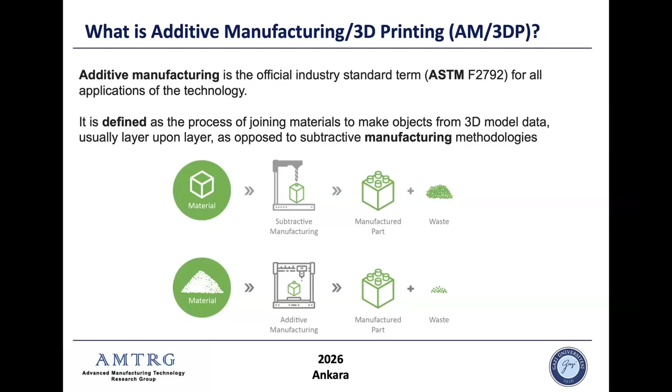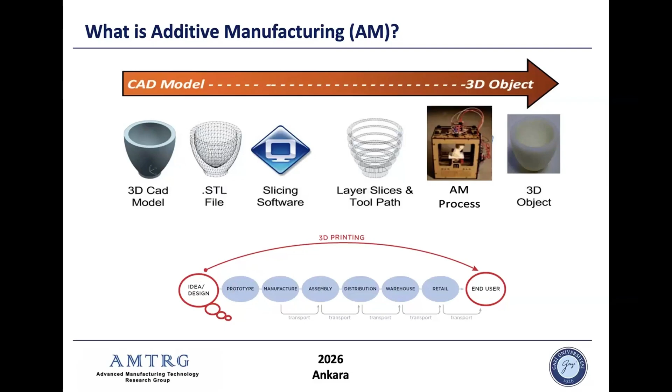And in additive manufacturing, of course, we manufacture parts from CAD data. I mean, we actually omit lots of steps in manufacturing, like tooling, assembling, etc. We send the digital data to the additive manufacturing machines, then we build the part as it is.

This is very good. Right now, additive manufacturing has, as a standard, 7 main technologies. I'm not going to explain all of them. Maybe in the near future there will be more, but right now we have 7 main technologies in additive manufacturing. And these use raw materials: polymers, metals, composites, ceramics, etc.

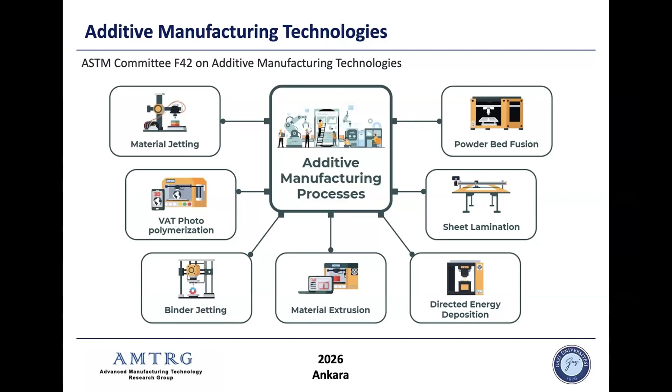If you focus on metal additive manufacturing, we actually use 2 states of materials. One is melted materials. We use 2 types of heat source. One of them is arc, the other one is a beam. That beam could be laser or electron beam. If it is arc, of course, we may use the welding arc or plasma arc.

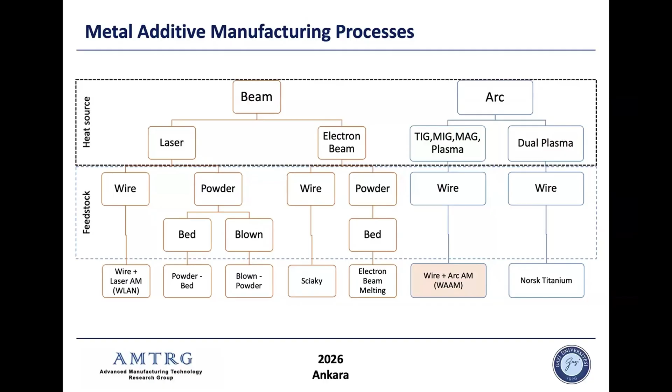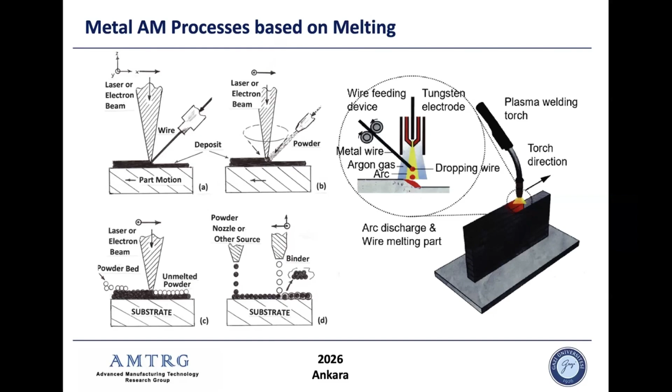So basically, we melt the material and we build the part layer by layer. Afterwards, the material solidifies, we produce the layer, and then we build the part as it is. So this is one way of building the part in metal additive manufacturing. It could be on the powder bed, or powder fed, or wire feeding, etc. This is how we manipulate the material. But at the end of the day, we use the metal in the form of powder or wire at the moment.

There are also other metal additive manufacturing methods. This is solid state additive manufacturing. We use friction stir welding: we do it not by melting the material but by stirring the material, building the part layer by layer. The other one, which I like very much also, is ultrasonic additive manufacturing. We ultrasonically weld each sheet of material and we produce the part as it is. This is also a growing solid state additive manufacturing method.

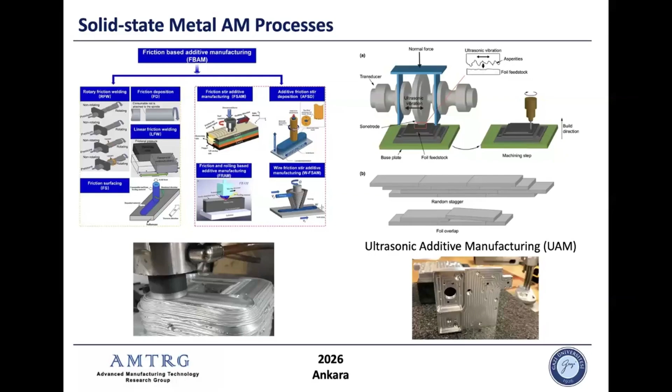Well, in my presentation, I try to get all of you to take a broader view of how additive manufacturing is growing. As I said, in additive manufacturing there are lots of technologies, but if you look at the additive manufacturing maturity index table, or that kind of graphic representation, we see which methods are widely used in industry right now or growing at the prototype stage.

At the moment, laser-based powder bed systems have the highest industrialization index as well as technology maturity index. Electron beam powder bed systems are similar, but a bit less than laser powder bed systems. That's why, right now, powder bed systems are selling a lot.

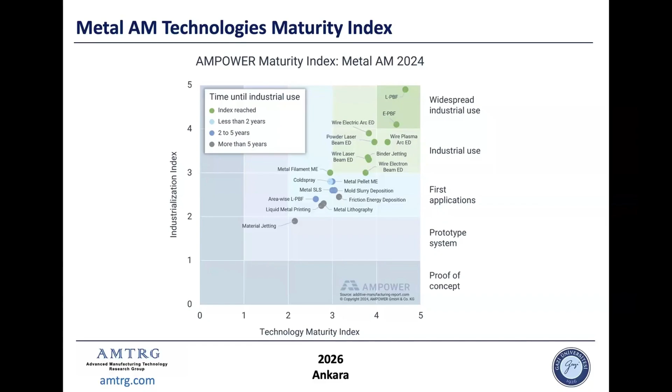But of course, we cannot say that the metal additive manufacturing processes have the same advantages. When we compare them together, in terms of complexity, yes, the powder bed additive manufacturing systems have more flexibility to give out truss structures, porosities, and very complicated shapes. But in terms of cost savings, they don't have that kind of advantage.

For example, WAAM, which is wire arc additive manufacturing, has better advantages in part size, platform flexibility, post-processing requirement, etc. So we may not say that one method is always the best. It depends on what kind of part you are going to build. So you have to select the proper additive manufacturing method, and you have to be conscious about it.

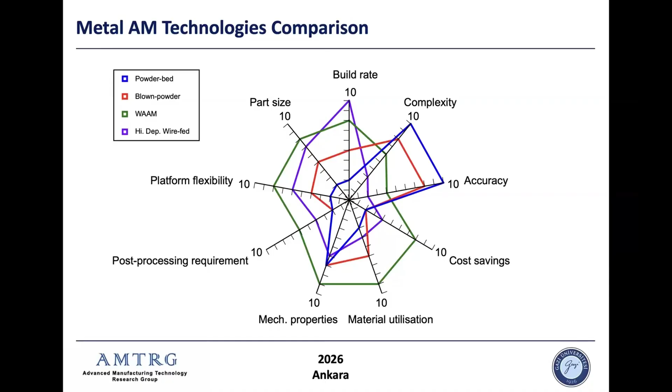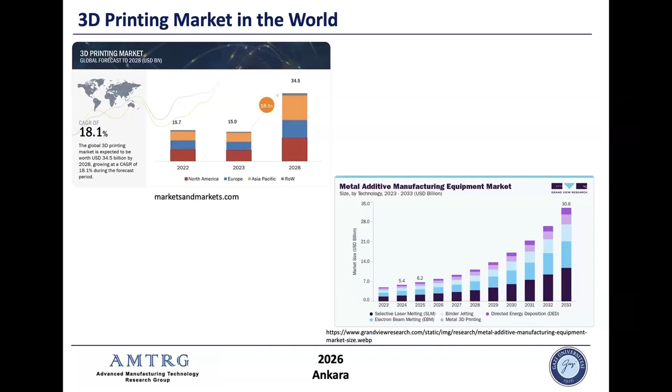When we take a look at the market, we see that over the last 10 or 15 years the market is always growing. In the pandemic years it went a bit down, but if we take a look at 2028, it's growing a lot. And the metal additive manufacturing market is also growing a lot. If you look at the metal additive manufacturing processes like powder bed, directed energy deposition, binder jet, you can see the amount. Yes, the powder bed systems have a big market size.

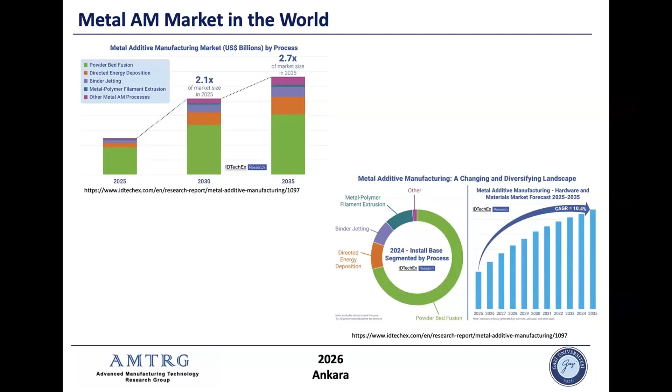And when you compare the powder bed side, because of the maturity index, it is now easy to use and the software is now fully developed. So you can use these systems on the commercial side. That's why it's sold a lot. Especially the directed energy deposition systems are also being sold a lot because they give high flexibility to build large scale parts as well.

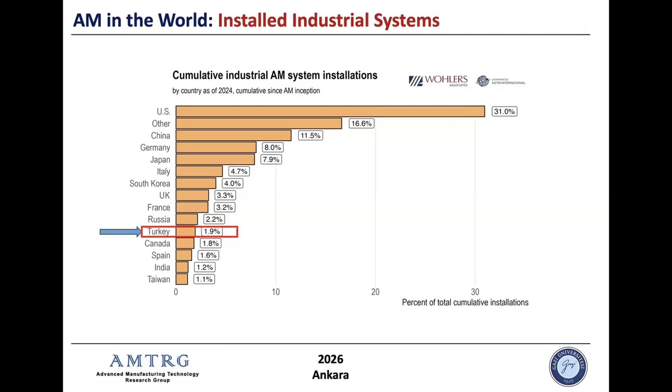The UK uses additive manufacturing for education purposes, a lot of PhD and MSc research, admitting lots of students. So that's why they invest a lot. Turkey is not in a bad situation, it's a good situation in terms of installation. But when you take a look at research, it's not similar.

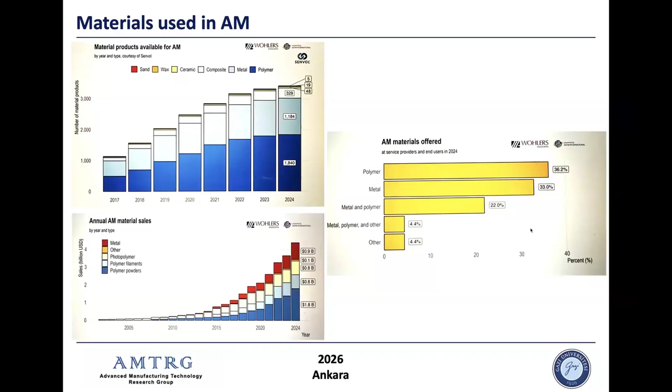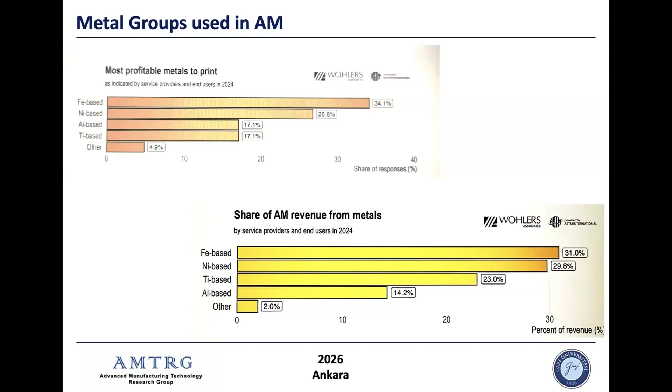Among the metal alloys used in additive manufacturing, iron base has the largest percentage; nickel base, aluminum base, titanium base come next. That's why at the moment the industry is more focused on iron-based metals like stainless steels or other types of alloys. Titanium alloys and nickel-based alloys are mostly used by aerospace industries, but on the commercial side, cobalt chromes and nickel-based alloys are very much used in dentistry.

And this is the pricing of AM metal powders. As you can see, rhenium is the most expensive one. Titanium is also expensive, both the wire and the powder. High entropy alloys are also expensive, and cobalt chromes and aluminiums are less expensive when we compare to the other metals.

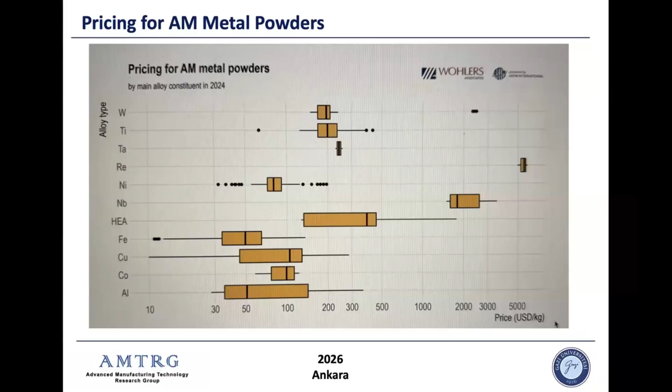On the research side, Turkey is 10th in installations, but I'm so sorry about that, we don't have a position in the first 20 countries. The US has the most influential effect on research. Then China, England, Germany, Australia, Italy, Singapore. I know that there are lots of big centers, research facilities, and universities with good establishments in research and additive manufacturing.

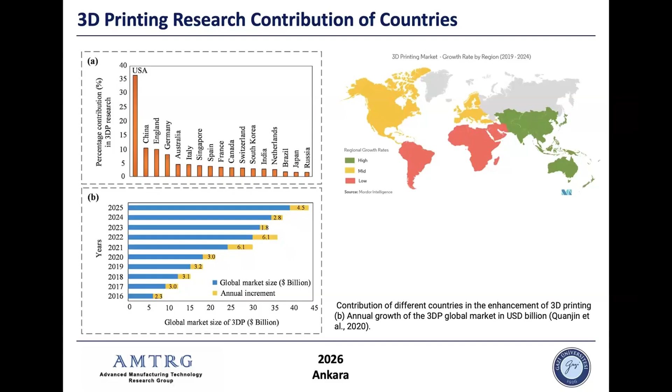And when we take a look at the research topics, as you can see, design for additive manufacturing comes at the largest scale, because at the moment the industry and people like to know how they can use AM in industry. That's why they try to find out which designs would benefit and be possible to build by additive manufacturing. Of course, microstructural and mechanical behavior analysis is next.

But when we look at the key keywords like digital twins, artificial intelligence, sustainability, and data management, yes, they are on the list. But especially modeling and simulation are the most researched in academic projects. And these are the shares of AM publications, and the GDP on research output as well. Again, US, China, Germany, UK, India, Italy, as you can see, these are the countries sharing these AM publications.

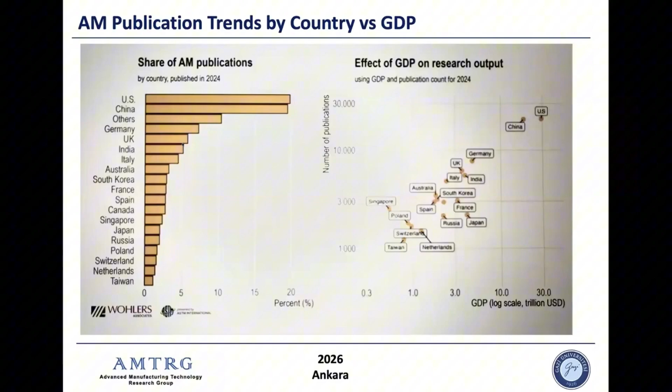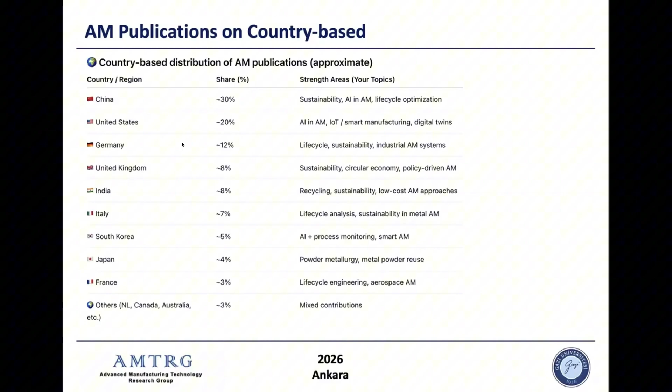And when we look at the country base, for example, China's share is 30%, and their strength areas are sustainability and AI in AM. United States, especially AI, smart manufacturing, digital twins. Germany, life cycle, sustainability, industrial systems. UK, sustainability. India, mainly recycling and sustainability. Italy, life cycle assessments, etc. So these are the main strength areas of the countries.

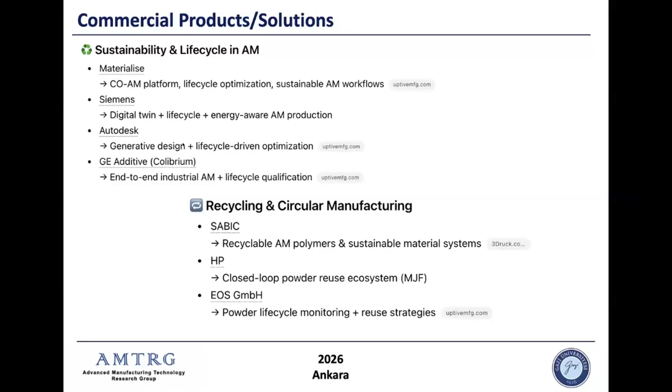And if we take a look at the company side, the commercial companies have some products in sustainability and life cycle, for example Materialise, Siemens, Autodesk, and GE Additive have some solutions and commercial products. On recycling, SABIC, HP, and EOS have some products as well. And Renishaw also has some commercial products. In artificial intelligence, Velo3D, Markforged, 3D Systems, and some other companies have products on these keywords.

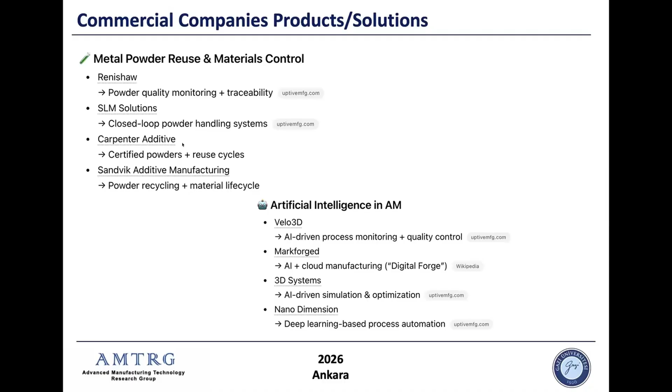And when we take a look at the continent side, like EU, APAC, and USA, the USA's core strength is especially AI, digital twin, and IoT. The EU, sustainability, life cycle, and circular AM, because, like your project, the EU pushed companies with regulations on sustainability and green technology, and also manufacturing. And the Asia Pacific countries focus on scale, materials, and powder reuse as well.

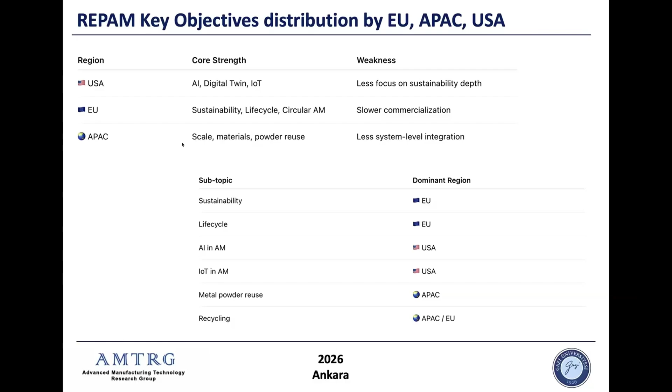Yes, in the last few years, work like Professor Sachin's on high entropy alloys is growing a lot because there are very good potentials there. And copper alloys and magnesium alloys are also in the circle. So therefore, much research is focusing on these materials as well.

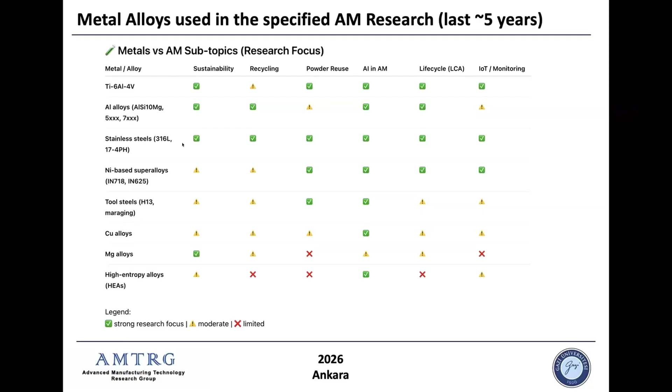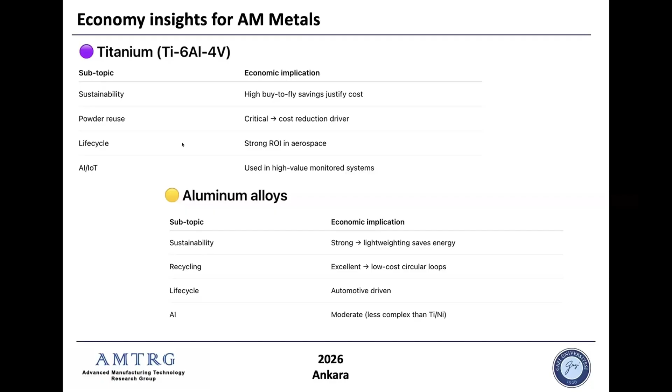These are some of the summaries of how these materials are economically, and why they are being researched in academic projects, like titanium and aluminum alloys in terms of sustainability. For example, from a sustainability perspective, titanium is a very popular alloy in aerospace. Because the buy-to-fly ratio is very critical in aerospace, we have to use titanium alloy as efficiently as possible. These other materials are summarized from the economic perspective and recycling sustainability as well.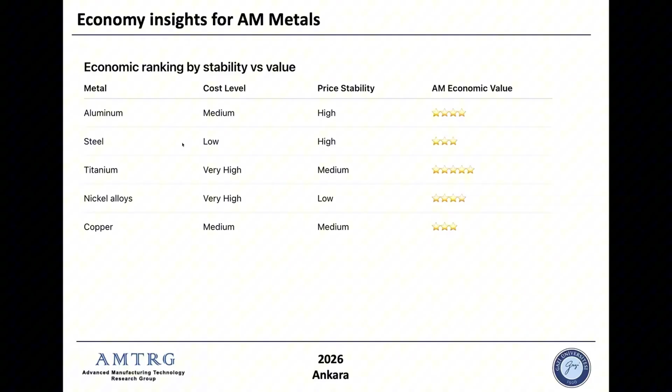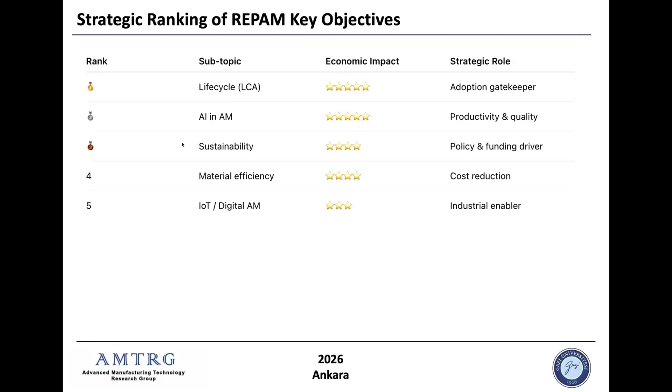So as a summary, we may say that life cycle, in economic perspective, is the first one of these objectives. Life cycle is very critical. And then AI use in AM is the next one. Sustainability is the third one. Material efficiency is the fourth one. And IoT and digital AM is the fifth one, based upon the research trends in the last 5 years.

So in conclusion, life cycle driven evaluation stands as the ultimate gatekeeper, determining whether additive manufacturing delivers real economic and environmental value at scale. AI-enabled process control is essential to unlock productivity, ensure quality, and make advanced materials economically viable. Sustainability is a non-negotiable driver, increasingly dictated by regulation like in the EU, energy costs, and global market expectations.

Material efficiency remains a core lever for competitiveness, directly influencing cost structure and resource utilization. IoT and digital integration are critical enablers that support industrialization, but true competitive advantage lies in combining all these dimensions into unified manufacturing systems.

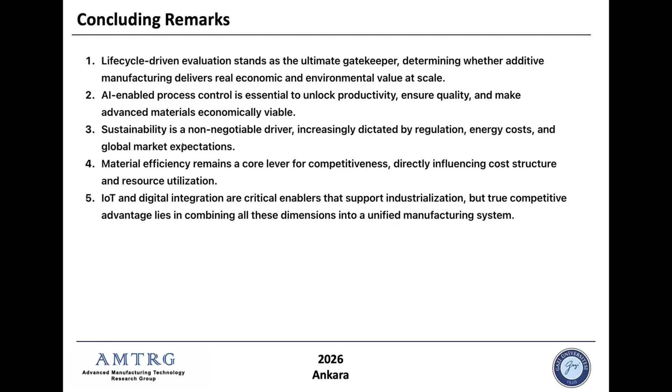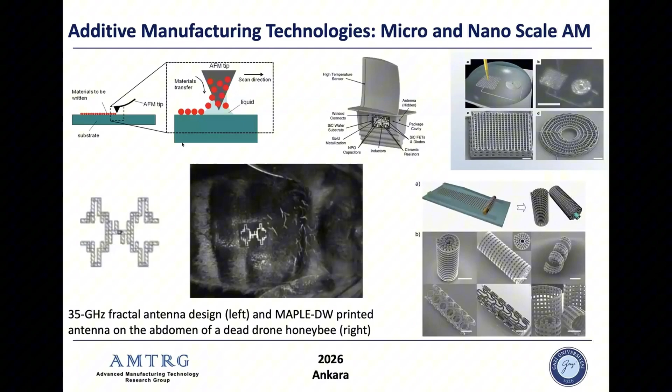So in my perspective, what will be the future trends in additive manufacturing? As I said, I have been working on additive manufacturing for about 20 years. I think micro and nanoscale AM has lots of potential. Most United States companies and universities are focusing on these areas, not the EU and Turkey. So there is very big potential there.

And also smart structures, especially using ultrasonic additive manufacturing, where you build the part layer by layer from sheet metals. So you can install wires, sensors, and other equipment inside the parts. So the part can sense, and the parts can give some data. That's why we call them smart structures, smart parts.

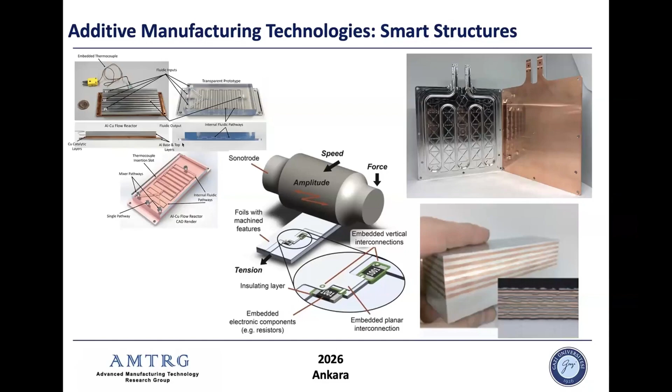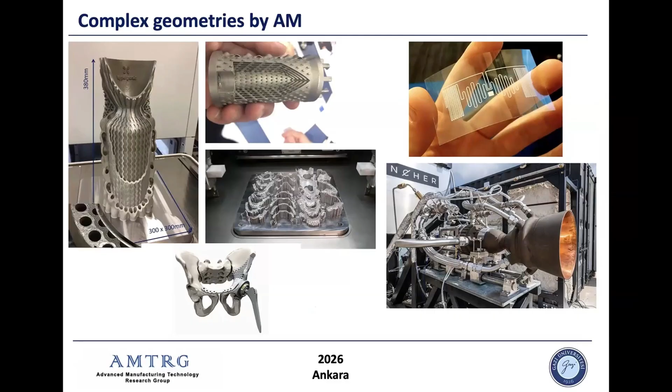Of course, complicated and detailed designs are going to be very critical. As you can see, very complicated and detailed structures and parts are going to be designed because additive manufacturing can manufacture them. Of course, 4D printing and bioprinting are very critical.

4D printing means that after 3D printing the parts, by stimulating them with heat or light, the fourth dimension comes. So we have the part in an original shape, and by giving some heat or light, it changes shape. So we call it 4D printing. There are some good applications of that.

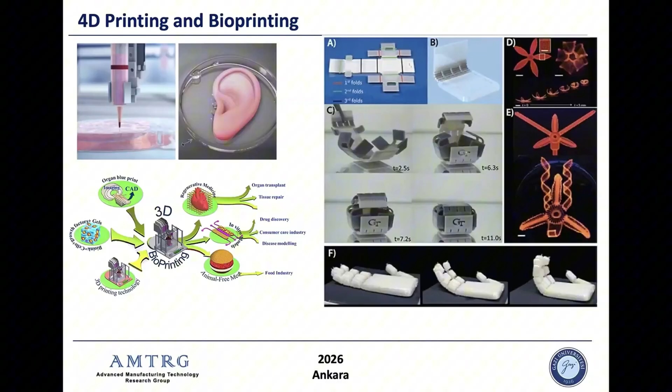Bioprinting is also very critical as well. Of course, additive manufacturing has lots of potential in electronics, drugs in pharmacy, and medical as well. So I think it's a good business area and research area. Aerospace is still leading this technology.

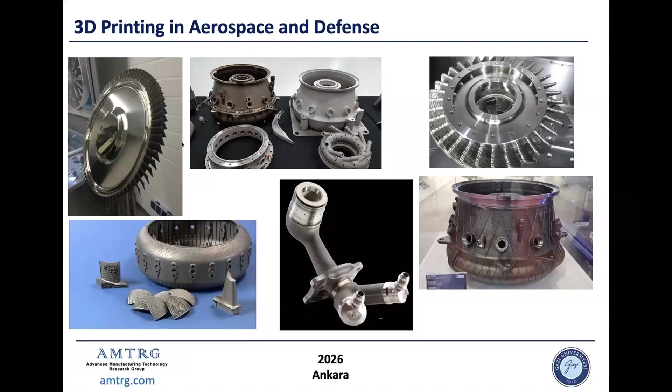Of course, in nozzles for aerospace and defense purposes, NASA and SpaceX use these nozzles as well. As you can see, they build them in a single machine, as complicated as possible.

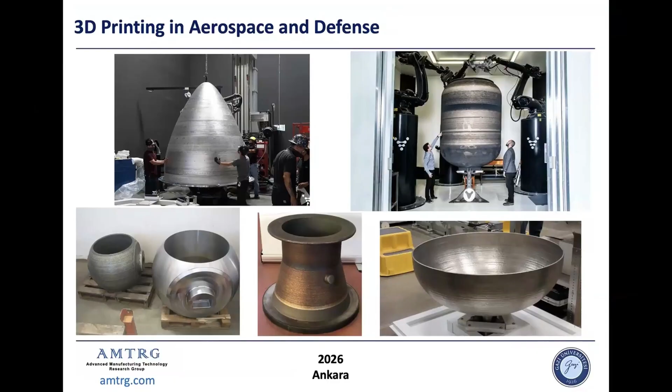Also, large-scale parts are being built by WAAM, which is wire arc additive manufacturing. Big sizes, like 5 meters or 3 meters, are built by layer-by-layer depositing, so they can be built as a single part. They even send them to space.

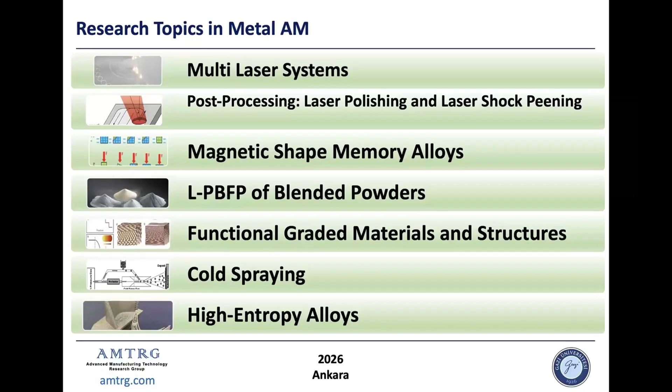So just a list: multi-laser systems, magnetic shape memory alloys, cold spraying, high entropy alloys, in-situ control, machine learning, new design approach, topology optimization, phase transformation. These are some other research areas as well as commercial areas. These are some research topics in the metal area.

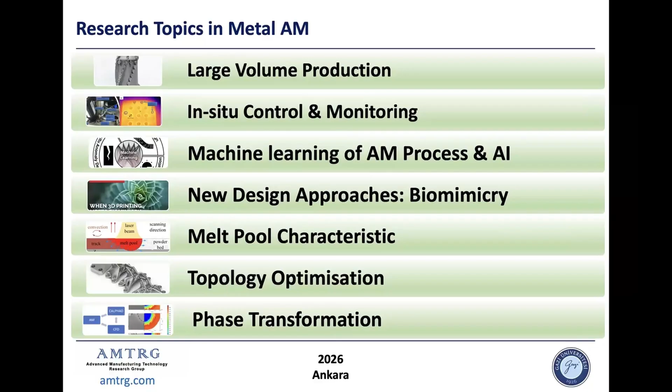And in Turkey, we have an association. We are also organizing international conferences. We did one last week, AMC 2026. Hopefully we will see you next year in Antalya, most probably. As I said, it is a very powerful conference. We invite lots of keynote speakers from all over the world, very powerful people, academics and from industry.

Do you have time? A very short video.